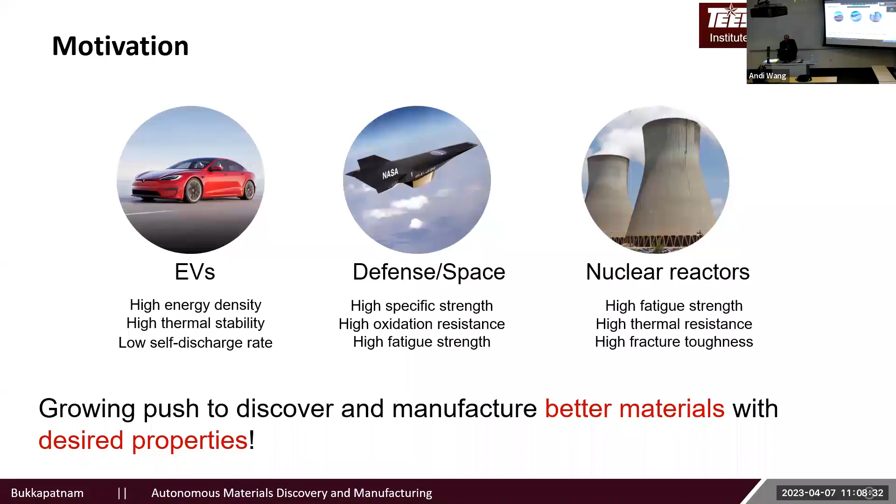But it's not so simple. It's not just about thinking up the materials, but you need to actually make them. The story I can bring is based on the case study of one of my colleagues, Ibrahim Karaman.

A few years ago, he was able to deploy the material he discovered into an aircraft system. It's a torque tube made out of shape memory alloy.

But if you think about what it actually takes to make those components, you have to come up with the right combination and make the material undergo an elaborate process chain of vacuum melting, forging, and then rolling, and then final heat treatment before you have a semblance of material that you could work with.

And each step of this process chain, you have to precisely control the composition, temperatures, as well as the processing trajectory. It's almost like making an elaborate and complicated recipe that you can eat.

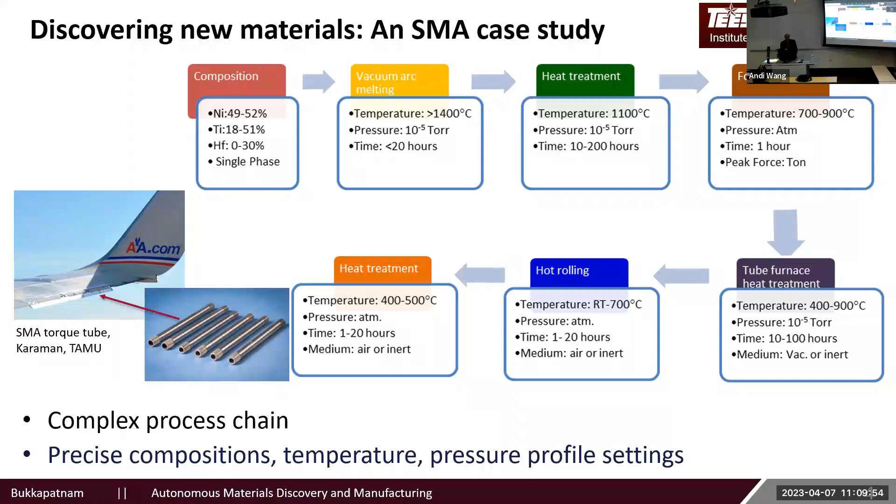And as a result, the whole thing took multiple years. It actually took 15 years from the point where Ibrahim thought about this material till he was able to actually see the material function the way it was intended to.

What was happening during this time? It's literally an Edisonian approach. That's what the material scientists do - trial and error. I'm sure those of you who are actually working in materials can quickly relate to that.

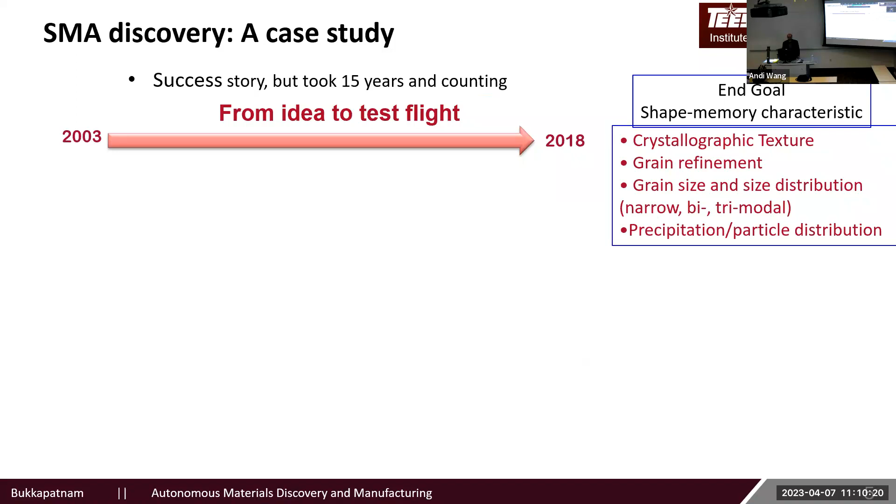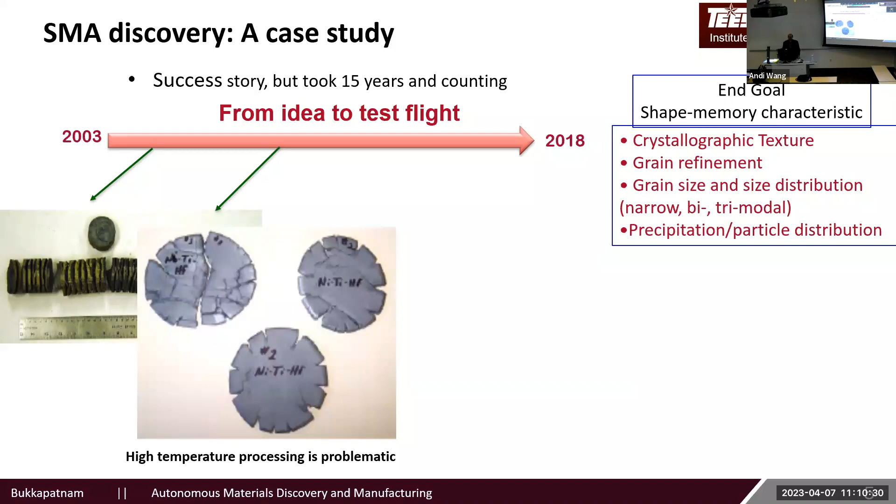You build a nice process to make this material. What comes out is literally junk. And then a couple of more iterations, you try to improve, and suddenly the eureka moment happens, and you get to what you're looking for.

This trial and error is extremely elaborate, time consuming, and extremely resource intensive, especially in the materials and manufacturing domain. The experiments that we really think about can run into a few thousand dollars for a single run.

You basically need to make sure not only you're making them, but you're studying what you have produced so that you can actually see if it meets what you're looking for or how well it does. That type of discovery process as it stands today is highly inefficient.

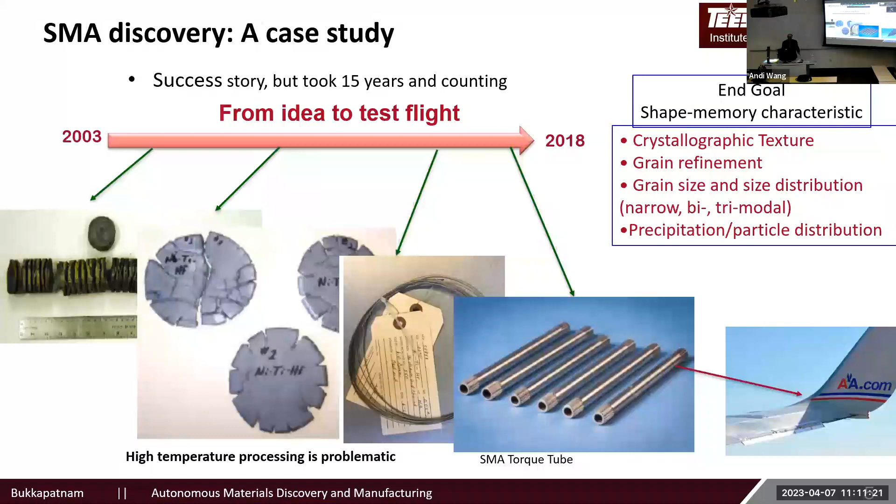This is pretty much a legacy from centuries of the discovery process. But now we have a newer challenge in hand. The idea is, can we think about this entire discovery process as some sort of an abstract frame and see if we can create our computers to do this discovery for us? And if so, to what extent can they do it? So just to abstract things up,

every experiment in effect is basically a point in this materials design space. You're trying to create a particular composition, what kind of elemental compositions you need for that particular alloy or type of material, what kind of recipe, what kind of process chain, and what kind of conditions you want so that you can get that particular material made.

That process is essentially one of traversing this highly high-dimensional and complex materials design space, where each point happens to be one experiment. Based on that experimental trial, you use your intuition to tell where your next trial has to be, and kind of traverse through this. And that's what took Ibrahim 15 years to come up with.

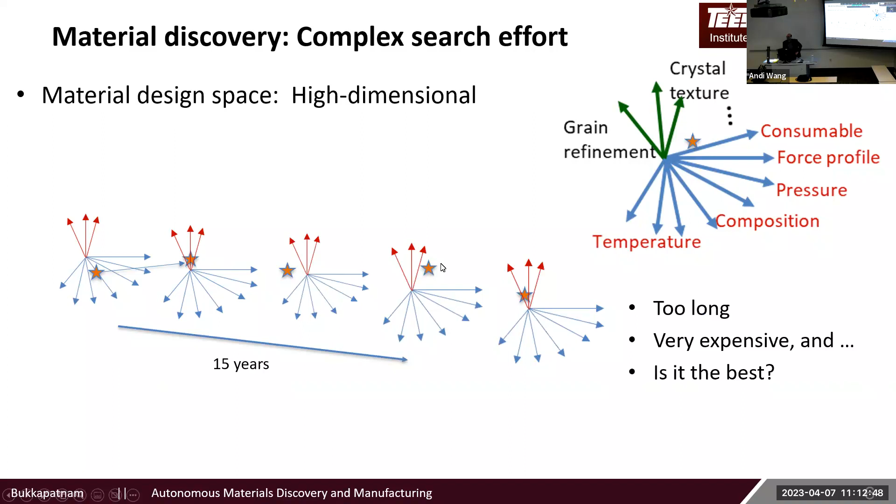Taking one experiment at a time, one combination of composition and one type of setting for all these different process parameters. Of course, it's too long, expensive, and needs to be improved.

Autonomous materials discovery and manufacturing focuses exactly on this challenge. And we are not the only group looking at autonomous materials discovery. In fact, the Department of Energy calls this a grand challenge of today, and uses that phrase on very few things—this happens to be one of those.

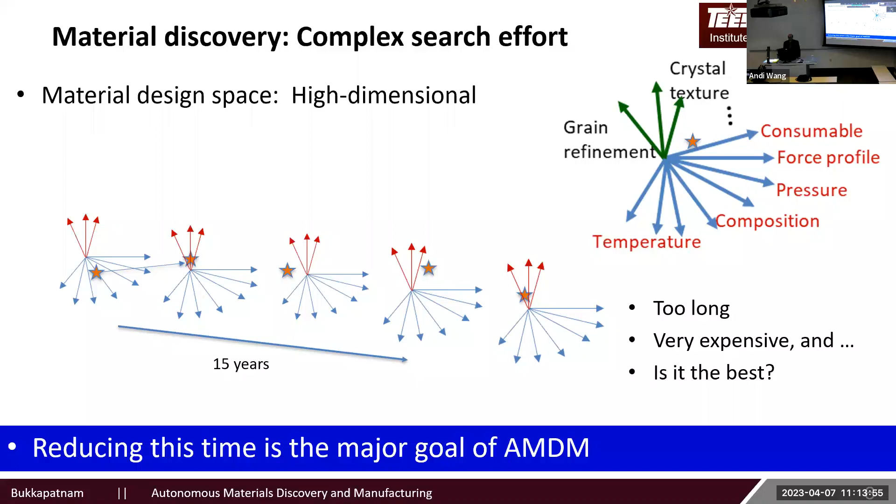But an even greater challenge we are trying to look at is the fact that you can think up and make a small piece of that material, especially in the polymeric space—you can create a good polymer with certain functionality at microscales. Can you actually manufacture these materials at bulk scales? And can you autonomously discover and make these materials for engineering applications in a single laboratory or shop floor platform? That remains the major challenge of autonomous materials discovery and manufacturing.

So to state it, the objective of this whole AMDM is to discover novel materials with specified, tailored properties, plus their manufacturing recipes or process plan, all done by computers using AI and data science. That is basically the major objective of this work.

And when we think about autonomy, that is another one of those abused words that you get to see, right? So I can put 'autonomy' so that I can get funded, I guess. But autonomy, essentially, if you go into the roots of it, has to have two components.

An autonomous system has to have the ability to learn. In the case of AMDM, it needs to have the ability to learn the underlying relationship that connects the process with the material that you made and the property you endow in it—PSP.

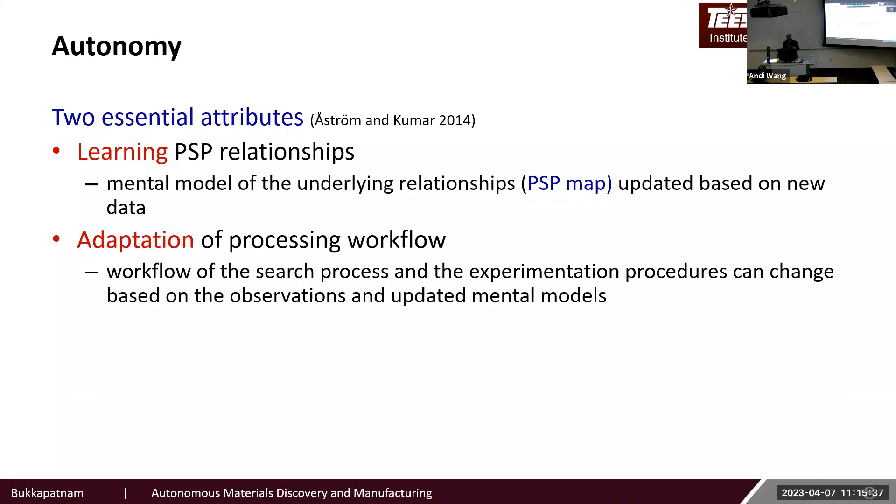And second is adaptation. You are not only learning about this relationship, but you are trying to sense the current state of yourself and the environment. Based on that, you tune your next step of how you traverse the discovery process, be it changing settings for the next iteration of your experiment, or changing process settings on the go based on the parameters you're able to glean. That type of learning and adaptation are essential components for any kind of autonomous system.

And of course, you can go to the next higher levels of autonomy. The system can have the ability to have cognition, have empathy, and the ability to be surprised and react to surprises, and have higher-order reasoning just beyond what it's able to learn. An autonomous system in this context has to be thought of and framed in terms of these properties that we want to enter.

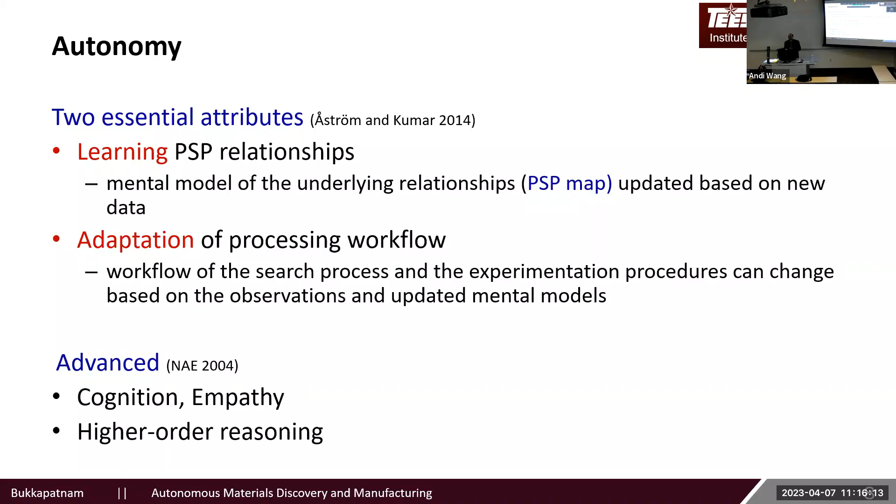And how can we build an autonomous system for materials discovery and manufacturing? We can think in terms of an autonomous cyber-physical system that we can construct for AMDM. In effect, such a system will have two components. The first one, which you see on top, is a brain, and it basically uses some kind of AI built into it.

And second is basically the brawn or the body of that system, which is essentially the manufacturing shop floor. So essentially, in some ways, an AI-driven manufacturing floor is what you can think about.

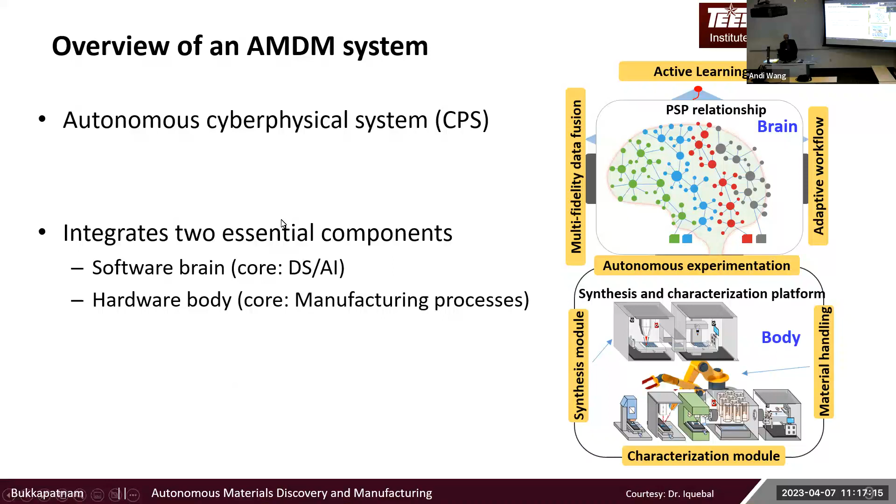There is always a debate, which is not well settled, as to whether an autonomous system has to be automated, essentially, or can an autonomous system be without full automation. Are they complementary, or basically subsets of each other? That's debatable, but in essence, an autonomous system has to have the properties that I mentioned. And also, it needs to address some interesting challenges.

The first one is it has to be able to learn the process structure property map that I had alluded to earlier. And it needs to be able to learn from the data that emerges in the process of discovery and adapt itself. What kind of timescales over which this data appears, and over what type of spatial distribution this data emerges, those need to be considered too. And also same thing with the adaptation in terms of how it adapts and how it reacts to those.

In this context, it's important to discern the difference between process to structure relationship and structure to property relationship. If you look at the overall material science work in this autonomous materials discovery, or materials design in general, the focus remains almost exclusively on capturing this structure to property relationship -- given my structure, what kind of properties would I have? Very little, relatively, has focused on connecting the process to the structure.

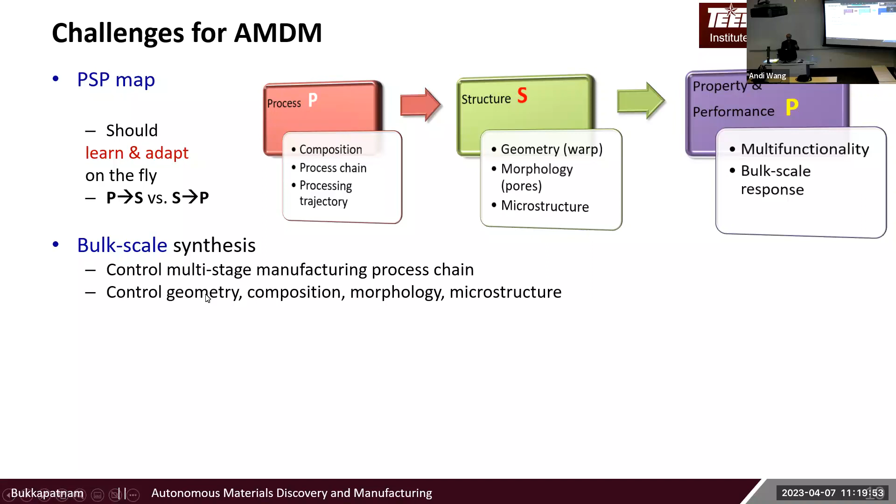Because you need to control not just the microstructure, as the material scientists would like to focus on, but go beyond that. You need to control the morphology, composition, and the geometry of the material. How can you endow those?

Third important challenge emerges from our ability to react to what you perceive. These control loops can happen at three different scales of resolution. You can control the process chain in the sense that go from one machine to the other. I can skip one machine and so on, just change the process flow. Sometimes you might need some extra rework. You can build that -- essentially creating that process chain sequence control.

Second aspect is looking at an equipment, trying to change the settings of the equipment. And third, which is probably more important for materials discovery, is the process state control -- how can you control the state of the process or the state of the materials that are being made as they are being made?

And also, while you do that, you need to think about a way in which you iterate across the experiments, from what you learn and how you react, by intelligently traversing the high dimensional space of materials that I spoke about. Whether you see some good opportunity and then search around that point to get the best result, or look at a point that is far away opportunistically, looking for something like fool's gold -- there may be something out there. So how do you go search for this gold mine of the new material you want to discover? These remain the essential challenges.

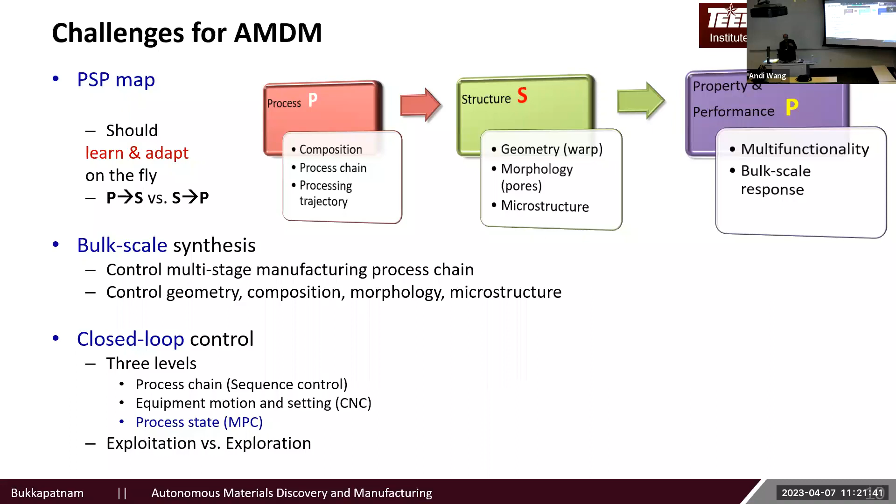So if you want to actually develop a system that achieves this autonomous materials discovery and manufacturing, you need to have a way to address these challenges at the very minimum. One implementation that we have got going at Texas A&M, we call the Smart Hybrid Machine Tool Platform. The remainder of the talk, I'll just basically share with you what this platform looks like and what we are using this platform for.

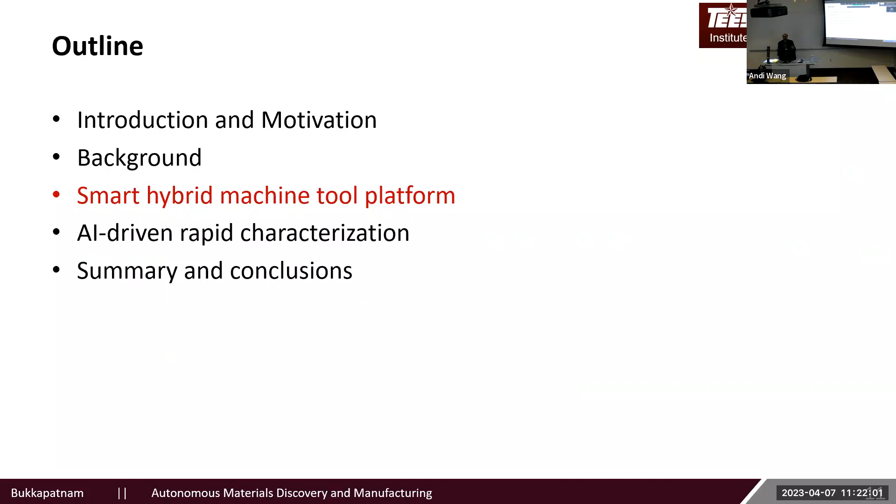This, if you can think about a hybrid platform as something that puts together multiple manufacturing processes into a single machine tool -- I like to call this a Swiss knife for manufacturing. So you can think about this machine: you can 3D print using a particular type of 3D printing process, it's a laser directed energy deposition.

And you can actually have a CNC head just next to it. There are two things: on the left, you see a laser head, and on the right, you see a CNC head. So you can actually use different kinds of machining.

End milling works really well. In addition, you can use the same laser head to kind of ablate the surface and beyond. And also, this machine has a turret. Basically, you can have 8 to 16 different tools with which you can work on the surface. You can grind it, form it, polish it, and so on.

So the advantage of putting all of them into a single machine is datum. Whenever you want to achieve precision, datum is important. You can actually tee off of what you printed to ensure what you subsequently machine meets what you want.

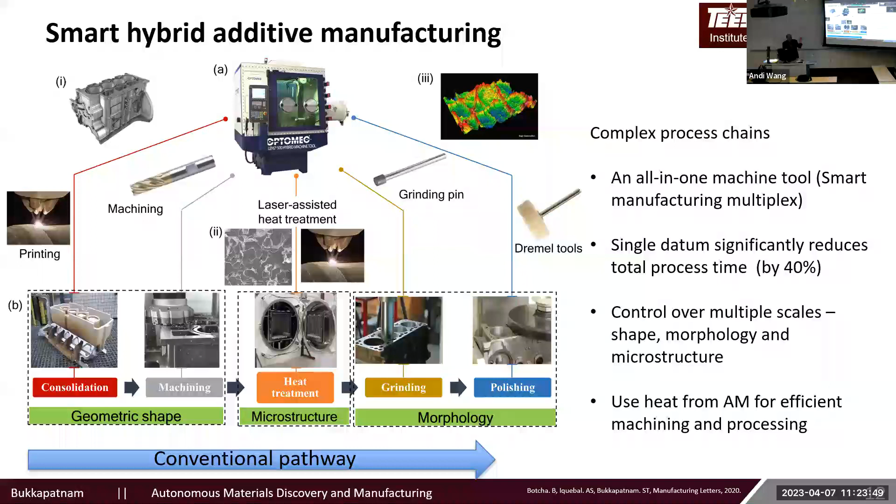It reduces the processing time. And also, since you're actually looking at multiple processes in a single location, you can possibly achieve better control, not just over the geometry, but also morphology and possibly microstructure. And you can get some energy efficient process chains, because the material gets a lot of energy into it during the printing process. How can we really harness that energy so that you can probably process that material using a much more favorable regime during machining and so on?

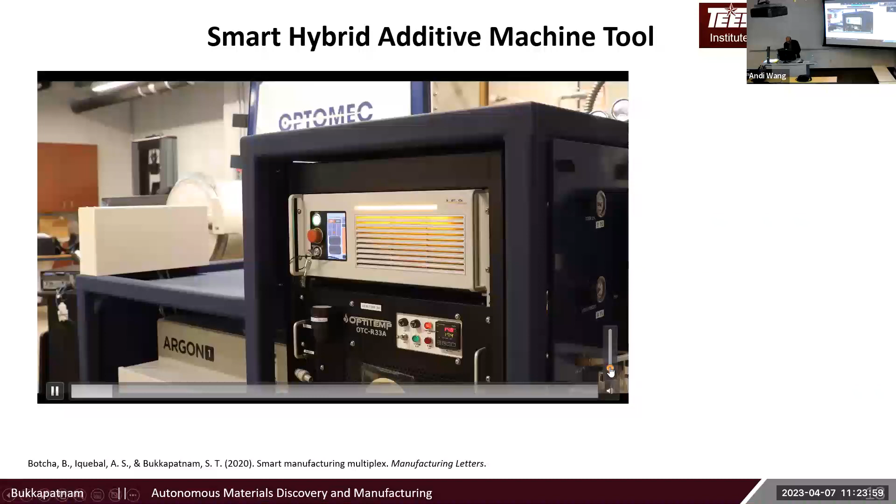So these are all some kind of possibilities. I'm going to see if I can play the small video here that shows that machine and how it actually works. So essentially you have a laser head.

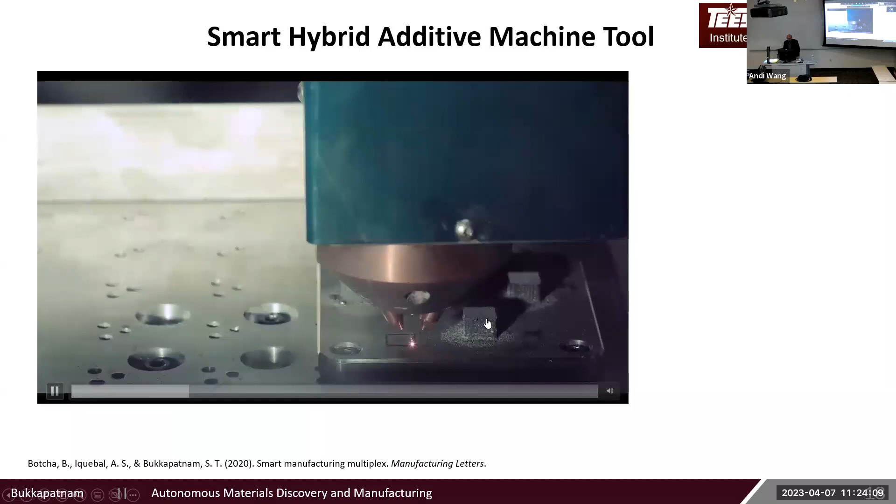The Smart Hybrid Machine combines additive manufacturing and machining. It uses lasers, metal powders, and heat treatment to modify the structure and properties of the created materials while collecting data about the material.

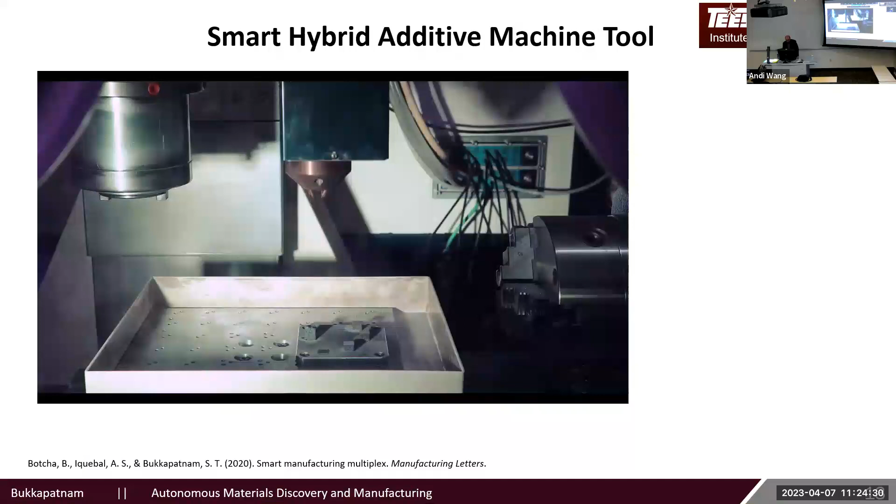This process can be automatically controlled using a computer. The computer uses code to create parts that can be simulated and verified by the machine before printing begins.

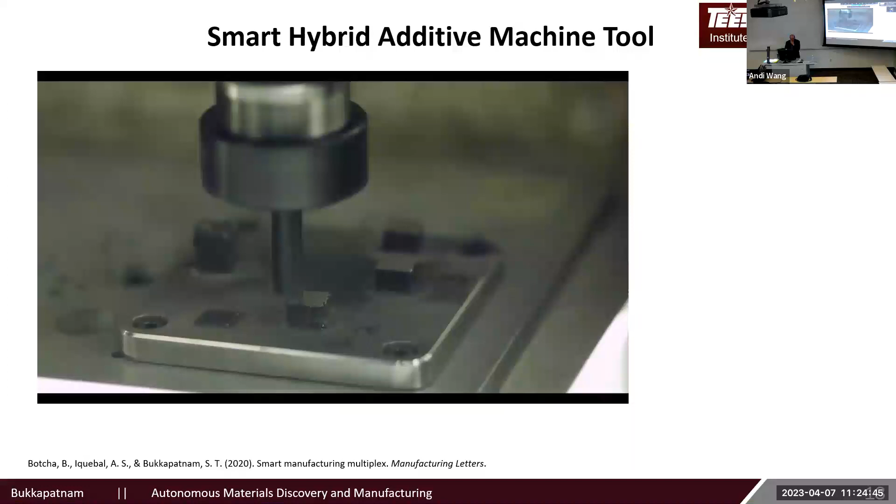The synchronous use of a high-speed camera and other instruments allows for faster data collection, which will speed up the discoveries of material properties. Around 1 gigabyte of data is generated every minute by the machine. This data, along with the discoveries from the machine, are speeding up materials discovery for the future.

Yeah, let me break this down a little bit. This machine can produce multiple batches. Within each batch, you can possibly create, I would say, like a centimeter by centimeter footprint, a dozen such materials. Each material can be made of totally different materials.

Each structure can be made out of different materials because you have a combination to do in situ alloying. In fact, each layer of this structure can be made out of different materials. Here you can see that the bottom has slightly different materials on top. So one was 316L, the other one is cobalt chrome.

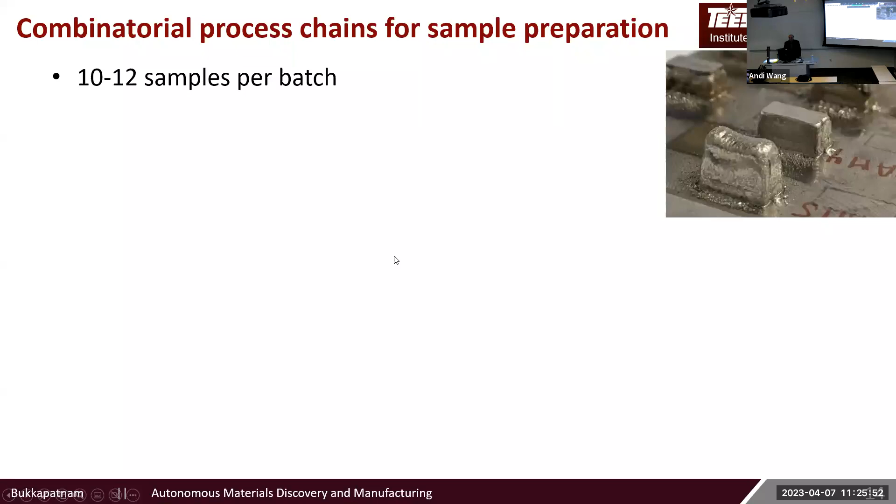You can just put one on top of each other. And in fact, each layer can be a different alloy in itself. And each track can be different ones too.

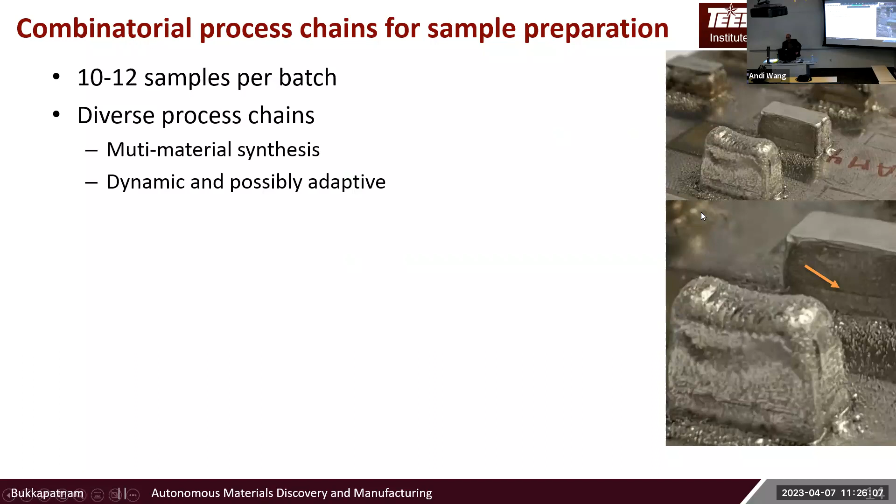So you can actually enhance the process chains. You can have multiple materials. You can synthesize in a single build. You can have thousands of different materials, and you can basically adapt it based on what you see of one material to build the next material and so on.

And we have been building some kind of external control loops to enable the use of information that we glean from various sensors to be able to adjust these so-called G codes on the fly.

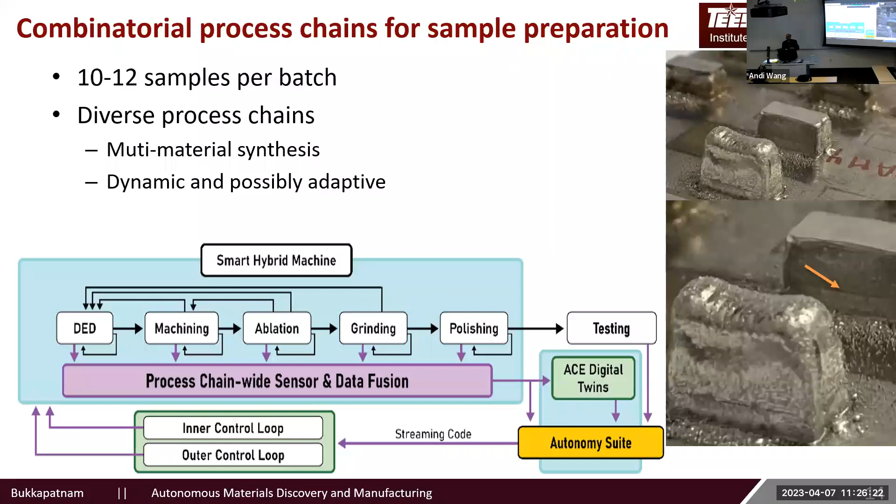And you can have these process chains not just limited to 3D printing alone and machining alone, but combinations actually create some very interesting synergies.

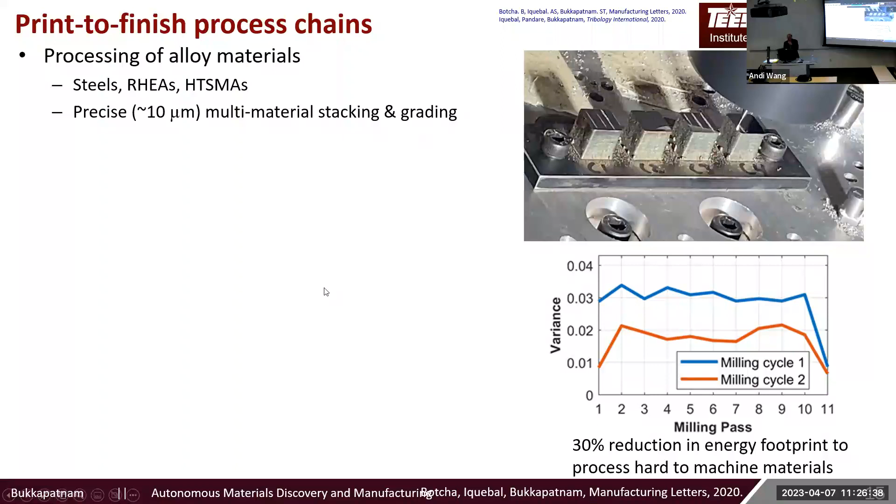And we have dabbled with different kinds of metallic materials. But most importantly, we can actually create characterization-ready samples while you're building it. So in other words, we pretty much literally start with a clean slate, or basically clean plate. And we can 3D print and then use this process chain to create surfaces that are almost like metallic mirrors.

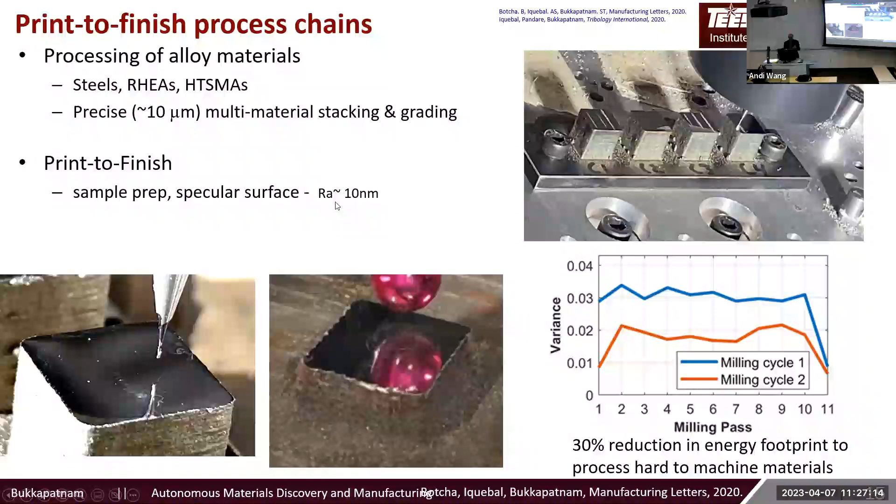You can actually etch it, or you can image it. You can do lots of interesting things, the same thing. Of course, it's all students who did all the hard work. They can demonstrate that they can get Ra as low as 10 nanometers, and possibly over time, they can do even better. And more importantly, this machine has been endowed with 14 different channels of sensors.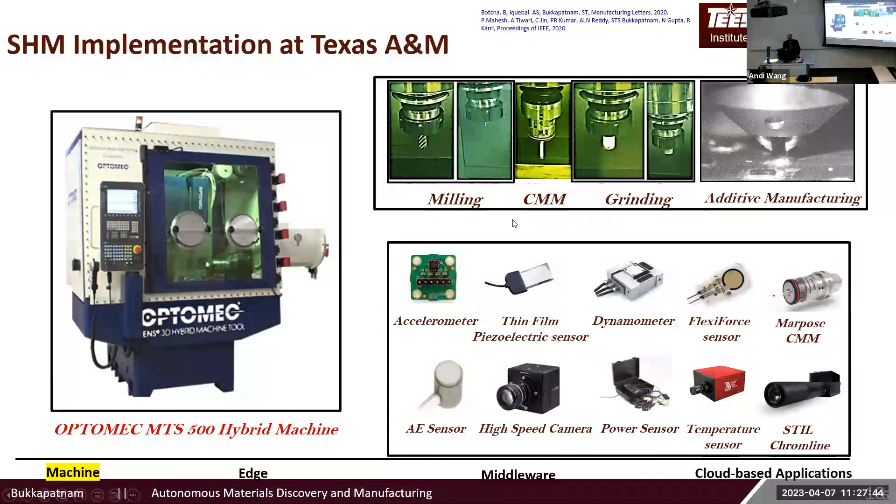We call this magic plate. Under the substrate on which you build the thing, we basically built a lot of MEMS sensors, thin film sensors to measure forces, acoustic emission, vibrations, and so on, in addition to having images to capture what's going on. We've been able to use process knowledge itself to align them to a few millisecond precision and a hundred micrometer precision in space.

On the left-hand side, you see multiple data streams synced up: acoustic emission, accelerometer, forces, thermal images, and data from the controller itself, OPC data. All of them could be captured, not only for printing, but also for machining.

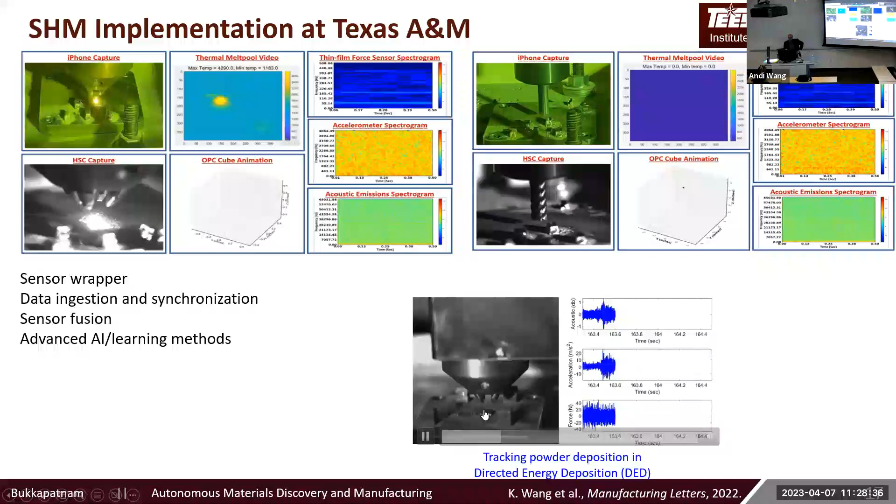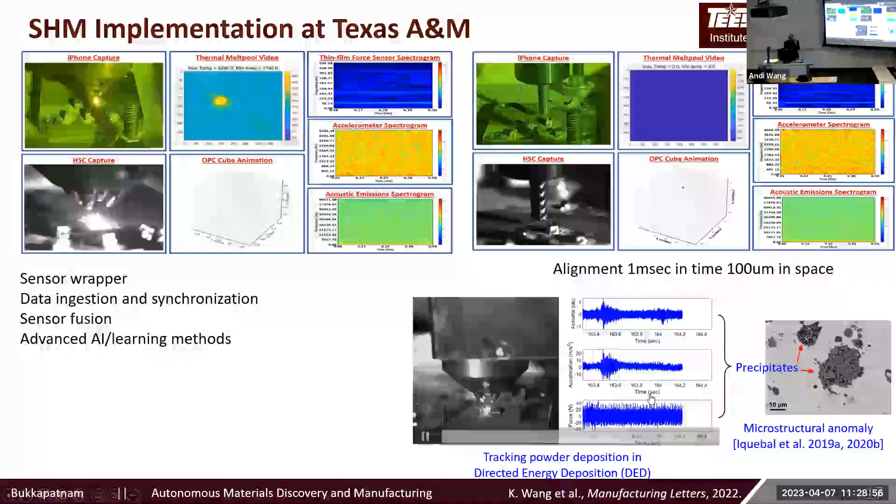From a research standpoint, what's exciting here is our ability to monitor the process in unique ways. While building a part, you can observe a small voxel, a fraction of a millimeter, on anything printed, and go back and ask what signals were generated while that voxel was being printed and subsequently machined at a different time. Or look at the surface and see what was happening during the process.

So essentially, you can do what is called multimodal data analysis and interesting interrogations that are going to be very important for autonomous materials discovery, because that's the data you need to enhance the perception to be able to adapt effectively.

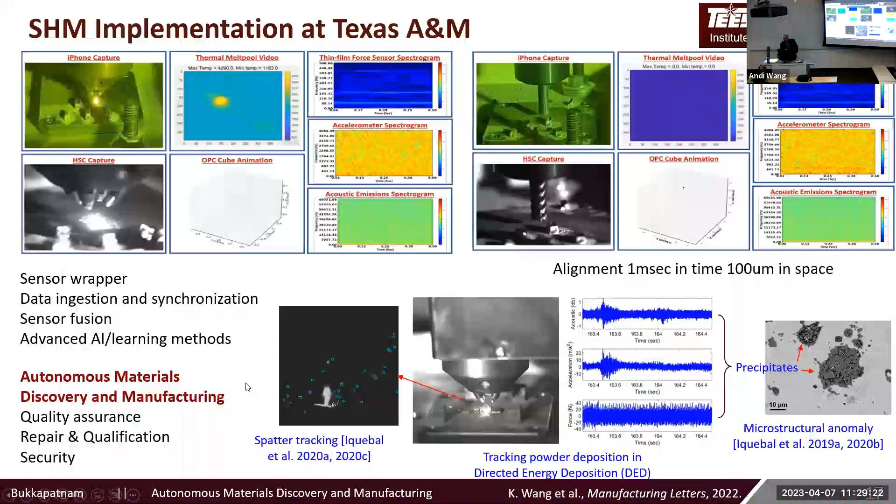This type of alignment builds some very interesting possibilities. So that's where I'll spend the remainder of this time on some interesting AI/ML methods we were able to develop. Specifically, we're not looking at improving how we make the part, but how we actually measure what comes out of the process.

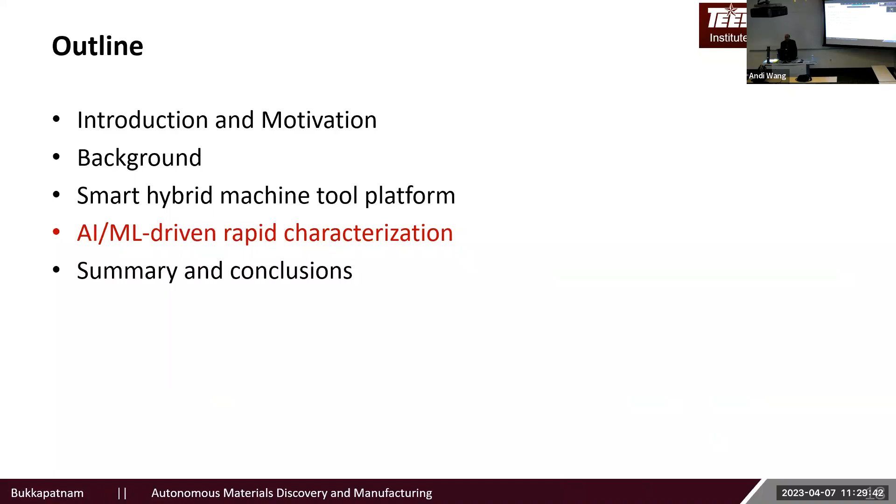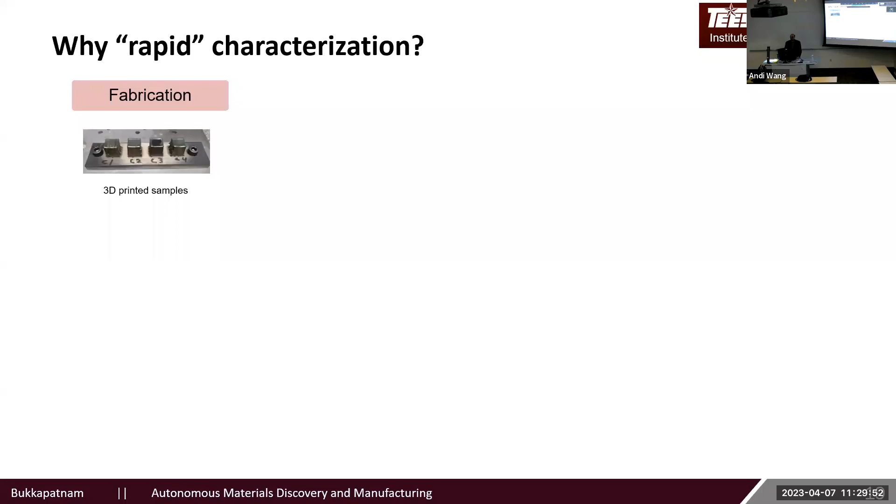We call this rapid characterization. Why do we need this? Because when you look at the materials we use for materials discovery, we fabricate them, and once fabricated, you actually remove the samples many times.

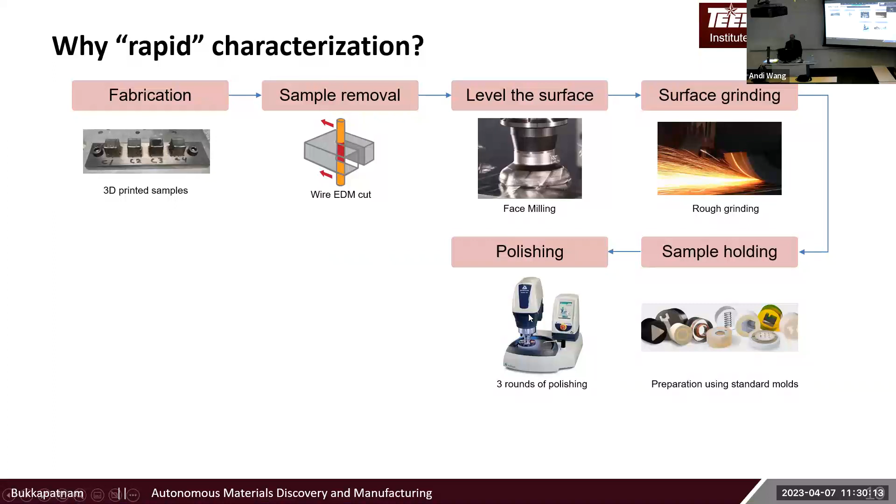For each one, before you finish it, you level machine, rough grind, then hold the sample in some kind of polymer, polish, and then do microscopy and other kinds of analysis. That's the usual process chain for studying and assessing properties, and typically it takes many machines, many steps, is extremely time consuming, and needs multiple experts.

Quickly, you can see why this hybrid machine can solve some of these problems—you can do all of these things in a single setting.

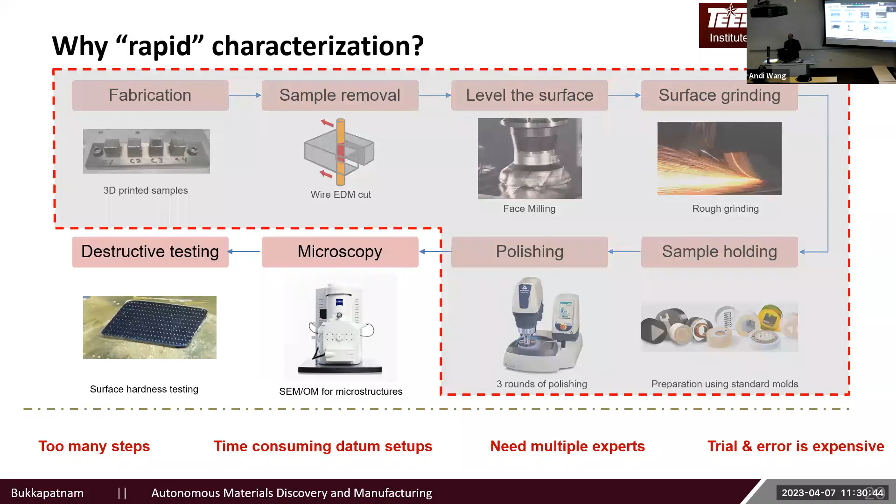As mentioned, we can go through these steps and improve the surface as we are actually making it, within a matter of a few minutes. Print and all the way to polishing can be done very rapidly, and more importantly, the signals we get can be used for interesting characterization applications.

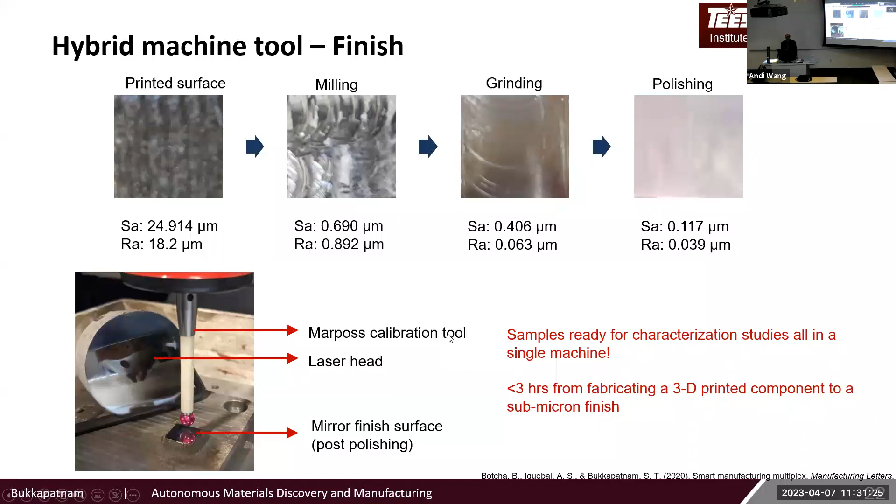I'll accelerate a little bit so we can go through this in less than 3 hours, from the moment you decide to print a particular material till you have all the property information, or at least the important property information on hand. How do we do that?

The idea is to look at how the process informs the microstructure or complete structure, and how that in turn informs the property. When we look at the whole cycle, the last AM-DM conference—called the DMDI conference, done by the National Academy in November of 2022—honed in on this issue of structure.

You can make the parts, you can measure the property, but getting the structure measured, characterizing the structure, remains the important bottleneck. And when you talk about structure, you shouldn't be myopic and just look at the microstructure or composition—a structure is essentially a multi-scale entity. You need to look at geometry, morphology, microstructure, and composition.

In the remainder of this talk, I'll just talk about one example of how we study one aspect of morphology and one aspect of microstructure and properties.

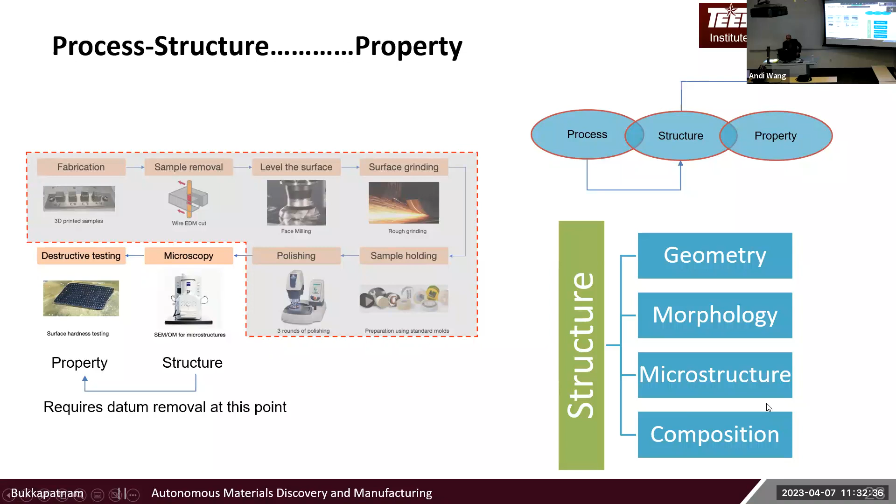When we talk about morphology, in addition to surface roughness, you have to worry about some interesting traces a process leaves behind. For example, in the 3D printing process, ripple structure is an important determinant. Once you effectively capture the ripple structure, you can pretty much tell what kind of microstructure and grain structure you get to see.

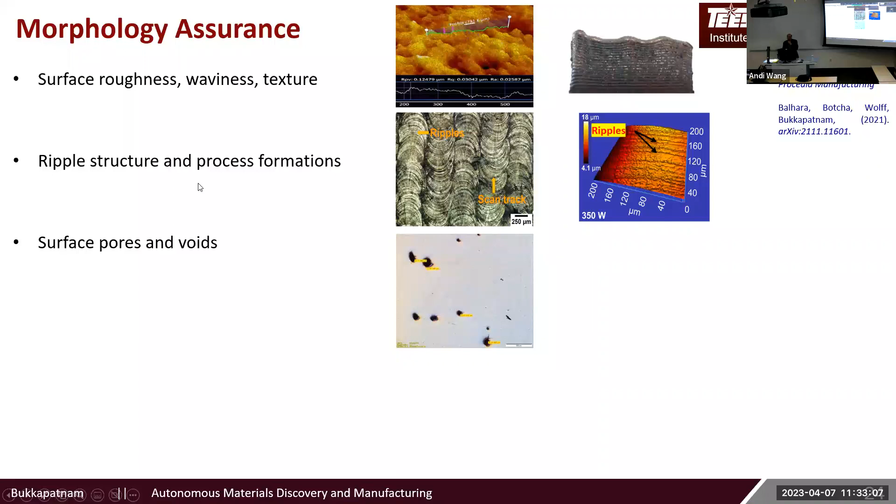You also need to worry about interesting features, sometimes called defects, like surface pores and voids, internal inclusions, scratches, and other external features. These tend to seriously undermine, oftentimes, the properties you're looking for. It's not the microstructure, but actually the issues with morphology that you need to really account for.

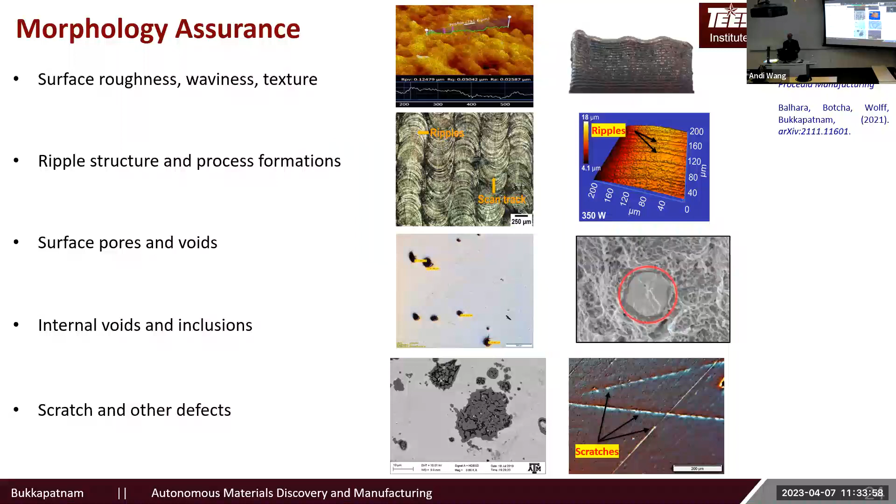The research has effectively focused on many of these, but most importantly, it studied the surface pores and prediction of these pores in the 3D printing process, because pores tend to be extremely deleterious. People have also talked about effectively controlling the pores to get the right effective density for some applications. But nonetheless, pores can be a major issue, and you need to be able to effectively monitor and track these pores as the process goes.

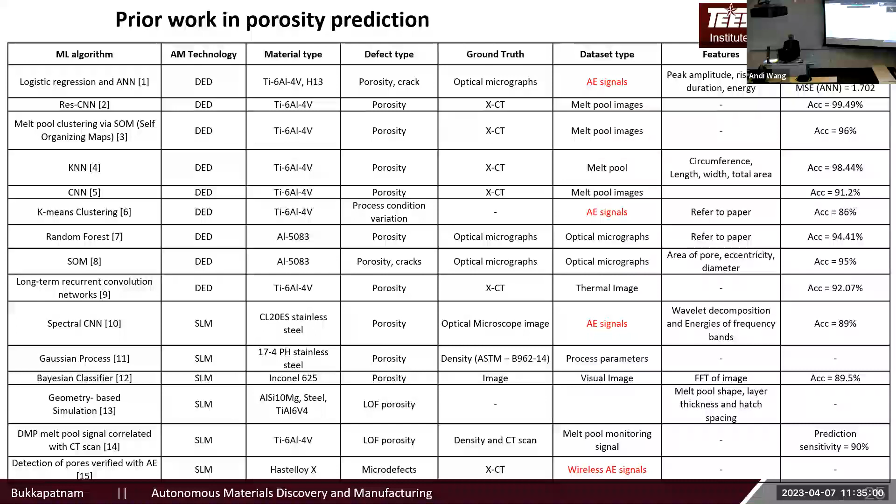Second, some people have tried to use acoustic emission signals to predict—essentially looking at the acoustic emission energy to predict whether that particular part will have or will not have a pore. But they were not able to localize whether a particular region or voxel within a part will have pores, or if so, how much, and so on. So there is no specificity.

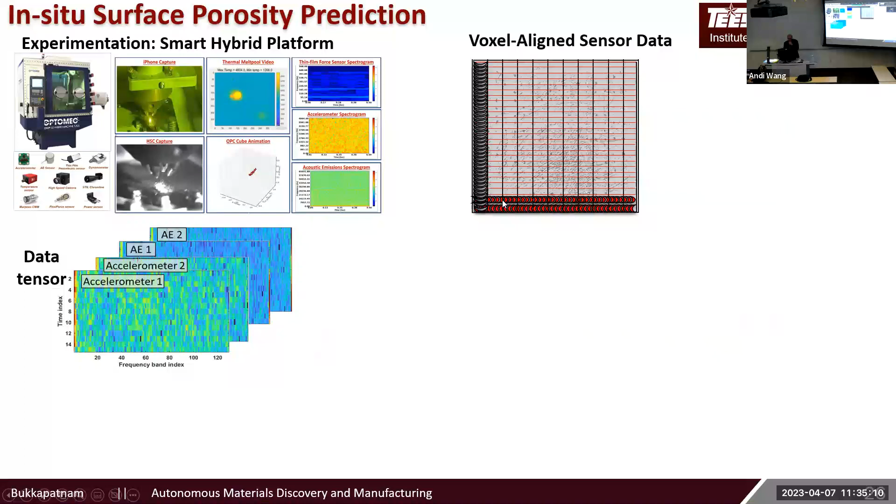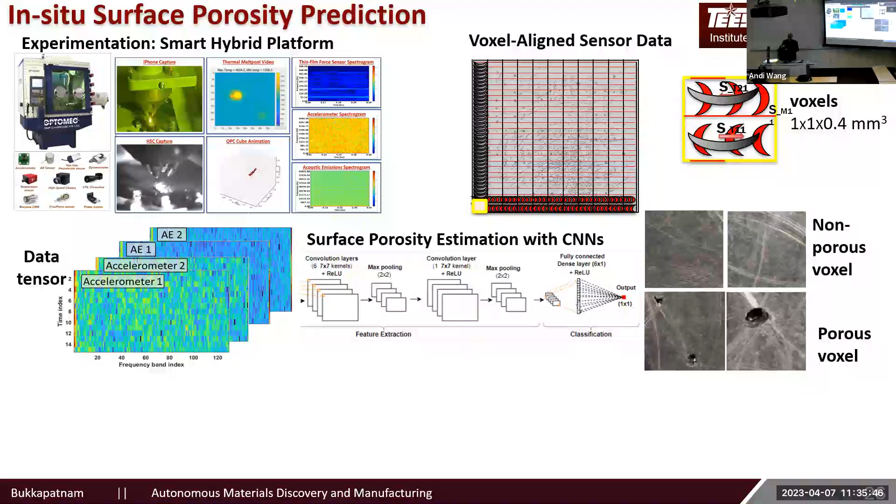So what we try to do is ask: can we predict whether a particular voxel that you have printed will have or not have pores, based on the various stacks of data we collect during the process? We are collecting acoustic emission data, and thinking of it as a data stream—can we use that to predict whether that voxel has pores or not? We can think of each voxel as being on the order of 1 millimeter or less. So, essentially scanning every 1 millimeter area based on the signal, how well can we predict?

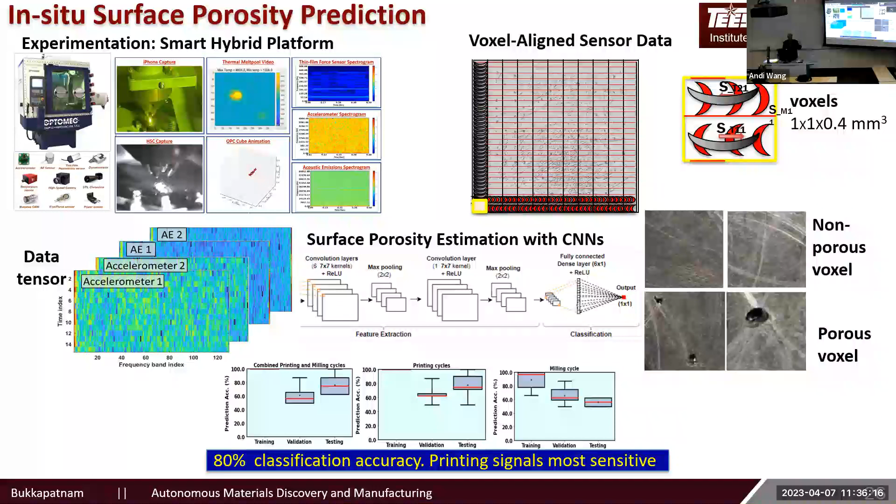It turns out, using just the printing data alone, you can get fairly good prediction accuracies. For training you can get quite high accuracy, but even for testing you can get at least 70%. So there's a high correlation with this data. You don't need high-cost images—simple, cheap data from simple MEMS sensors, literally less than $10 each, can be used for these applications.

Of course, deep learning can relate anything you want. But is there any physics underlying it? Is there something we can learn about the process? That's where we use methods called explainable AI, or XAI, to look deeper into why this happens.

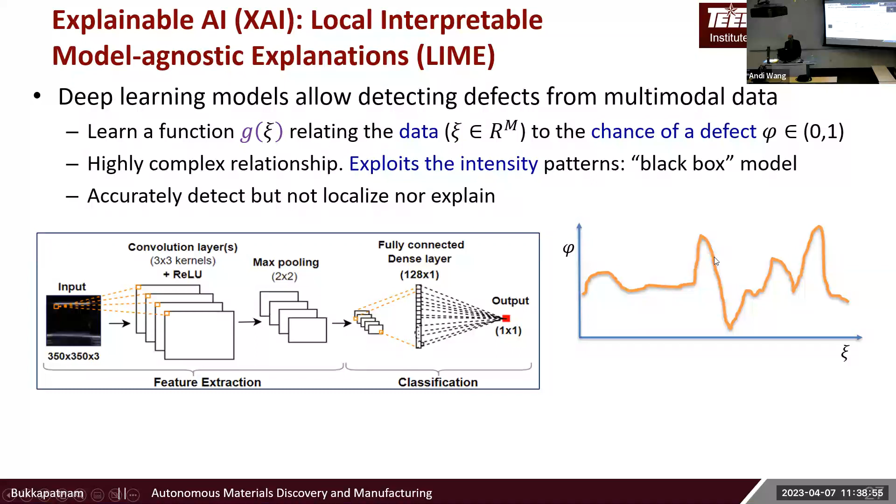A simple line graph illustrates this. Suppose I'm looking at a particular pixel, or a particular acoustic emission data point. As my acoustic emission increases in intensity, the probability of presence or absence of a pore doesn't increase linearly—it increases and decreases in a very nonlinear way. Around this value of intensity, as intensity increases, the probability drops, whereas around this other point, if intensity increases, the probability increases.

If I take a global picture and look at a particular component and how it influences the output, it's almost like putting one foot in cold water and one foot in hot water and saying that nothing influences. So you get highly misleading results.

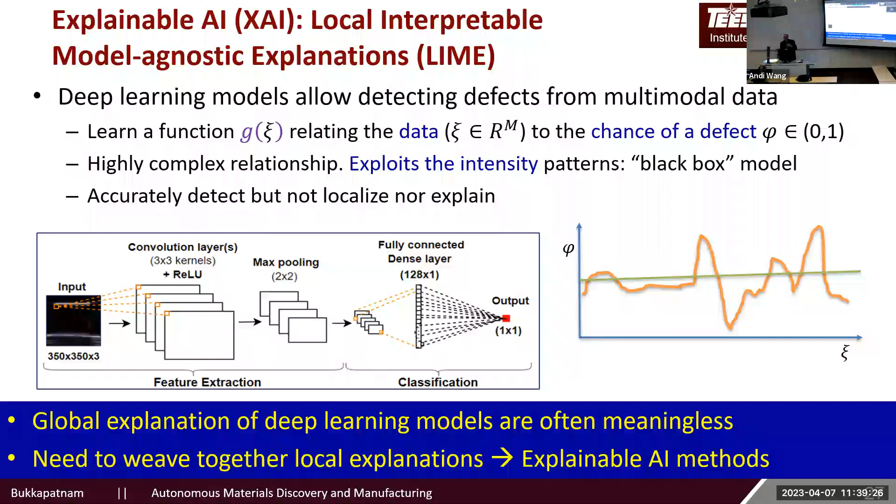So what these XAI methods do is come up with simpler explanations for every region and stitch them together to derive some global explanation. They use simple linear models around each input to come up with a beta, which tells you the influence of each input component on your output at a particular location. It generates multiple betas, one at each location, and based on the collection of beta values, it provides an idea of how individual components of data inform your output.

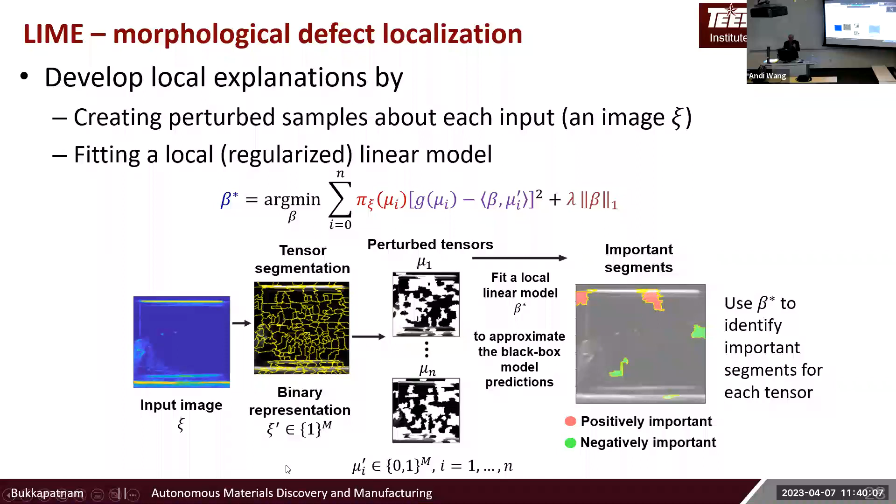You can actually learn something very useful from there. It uses some kind of perturbations of your input image to create samples to build these types of models, and here you need to be extremely careful about how you choose these perturbations. Otherwise, you might get some kind of absurd results.

There are some very nice works happening in terms of building the right kind of models to generate these local explanations. Once you build those local explanations, how do you bring them together to create global understanding, stitching them together? That also remains a major problem. There are different kinds of ranking criteria that people have developed to consolidate these local inputs to create a more stitched up response.

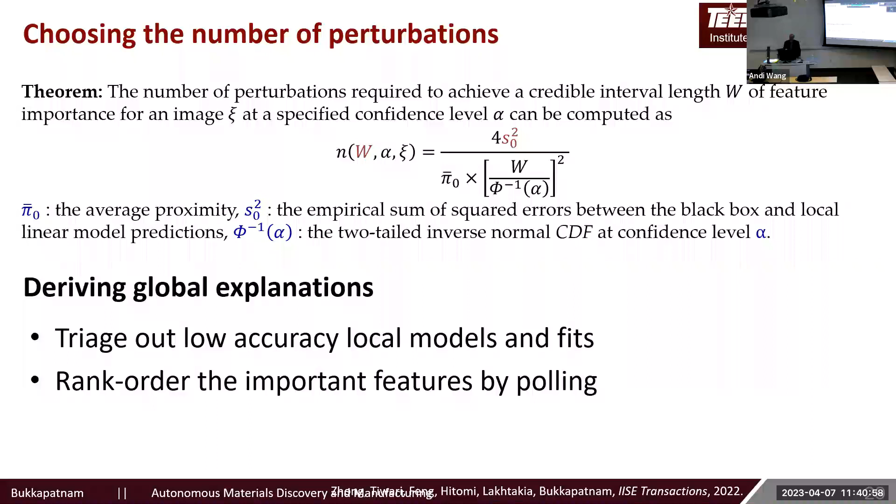An even more important challenge is, based on these outputs, how can you generate physically meaningful information about what relationship you're trying to track? How do you come up with a physical explanation from purely the mathematical outputs of these linear models?

To illustrate that, let me show a simple result we got. For this particular model, we found that the LIME importance, the beta values, were very high for the high frequency components of the acoustic emission. In other words, nothing else mattered except for these high frequency components.

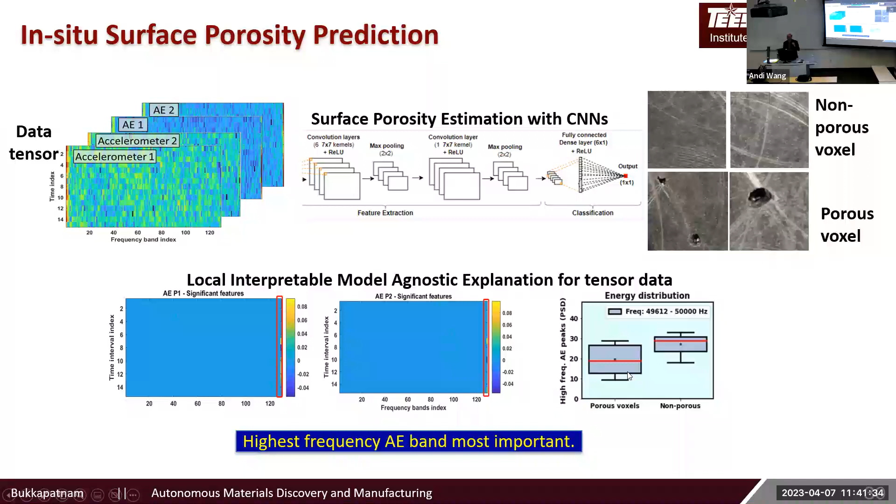And it somehow shows that for non-porous voxels, you have slightly higher energy compared to the porous voxels, for these higher frequency components. That's great, right? Why does that happen?

It turns out that if you look at these higher frequency components of acoustic emission at different points in time, they have different levels of energy. It's almost like some kind of waveform was taking place. And the variations for the non-porous were much less compared to the porous voxels. As a result, for porous voxels you have kind of an on-off behavior, and as a result the energy was a little bit low.

Second thing that really stood out was that even among the porous voxels, this whole region is split into two. When you go back and observe the images, you basically have higher energy among the porous voxels when you have spatter, versus when you don't have spatter.

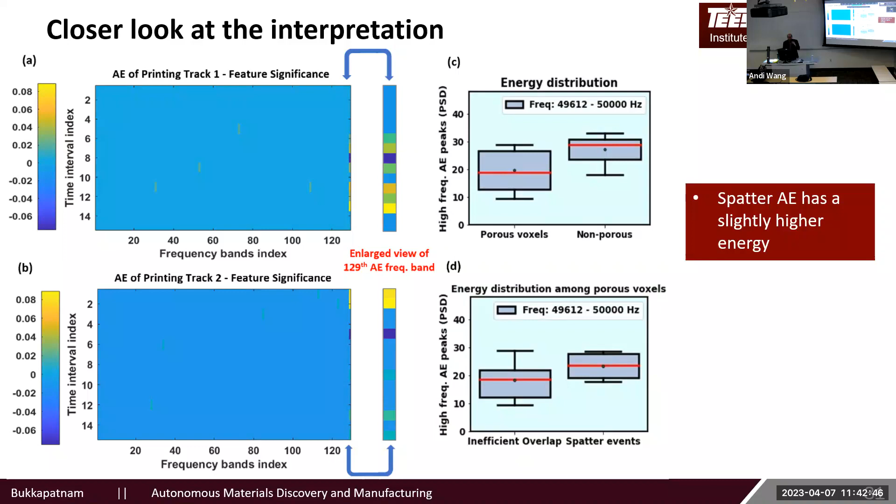Whenever you have slightly higher energy among the porous voxels, you tend to have highly spattery patterns in your thermal images, like sparklers flying on the Fourth of July. And when you have that low energy in the porous voxels, you basically have a very benign type of approach. So you have this huge energy variation.

If you look at the overall results once again, the higher frequency band of acoustic emission pretty much carries the information needed for detecting pores within a particular voxel region, and these high frequency bands are somehow capturing the information related to the spatters that are taking place.

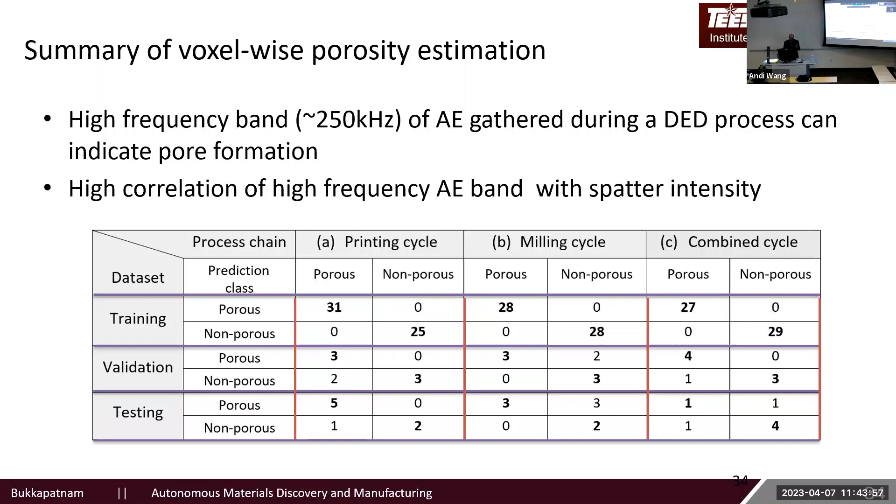We are still working a little bit on how we can clearly characterize the time frequency characteristics of the acoustic emission related to the generation of spatter. There may be some very interesting outcomes we are looking for, where we can actually use it to effectively control some of these pore formation mechanisms.

I'm going to shift gears a little bit and run through an interesting facet of what we have been doing. We can also use not just the acoustic emission, but simple images taken online or offline to determine some of the properties.

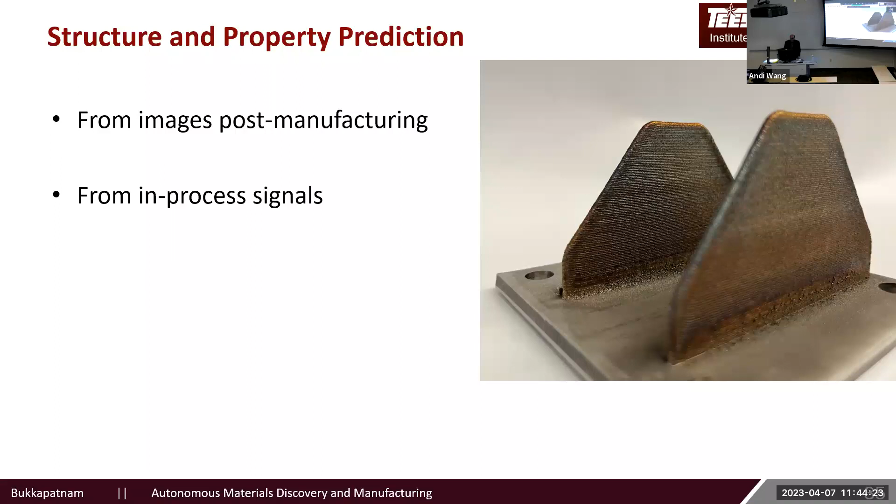Why is this important? Because to go and get that measurement offline will take an hour. Can we have the surface, and use those images which are abundant, to predict what kind of hardness it has?

But you need to, if you look at the surface, it's basically highly heterogeneous. It has different kinds of grains, and different grain boundaries separating them. So what you measure as hardness is basically a result of the composition of different kinds of grains put together.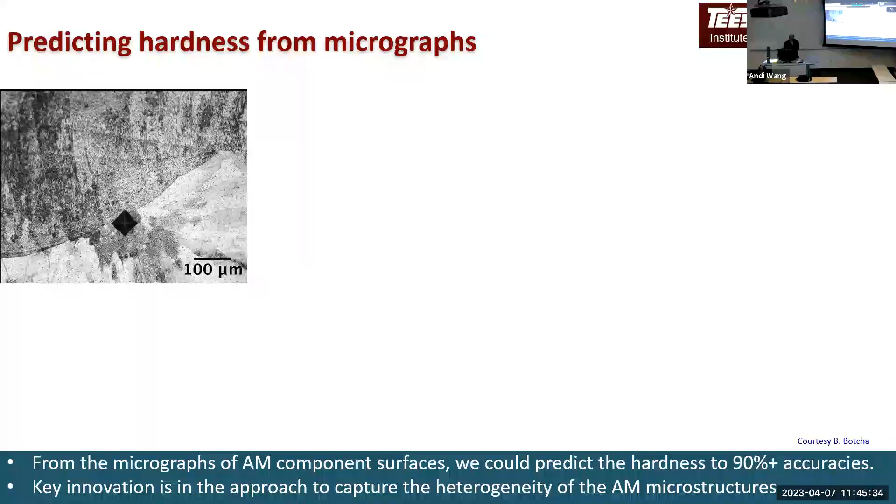In some ways, predicting this hardness is very similar to predicting how the face of my child will look by taking a photograph of me. But you can do a little bit better if you take not only my photograph, but my wife's photograph, and maybe the photographs of all my relatives. And if you put that into a machine learning method, you may have a better chance of predicting the photograph of my son.

Something like that. So that's exactly what we did. Instead of trying to take the photograph exactly here and use that image to predict, we took the nearby surrounding images, and we built a foundation AI-based method. Essentially, we trained a VGG16 for feature extraction.

Basically, it compresses this tensor into some kind of a flattened, low-dimensional representation, and uses this low-dimensional representation to predict the hardness. In our case, we were able to predict it.

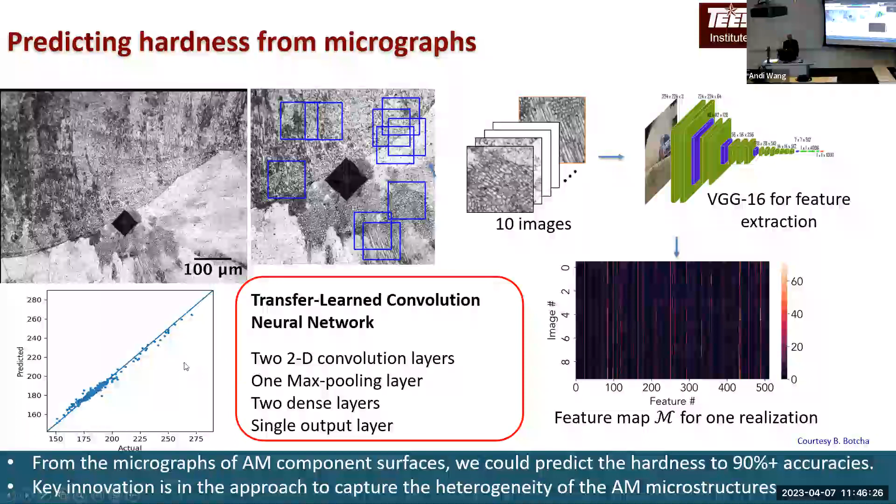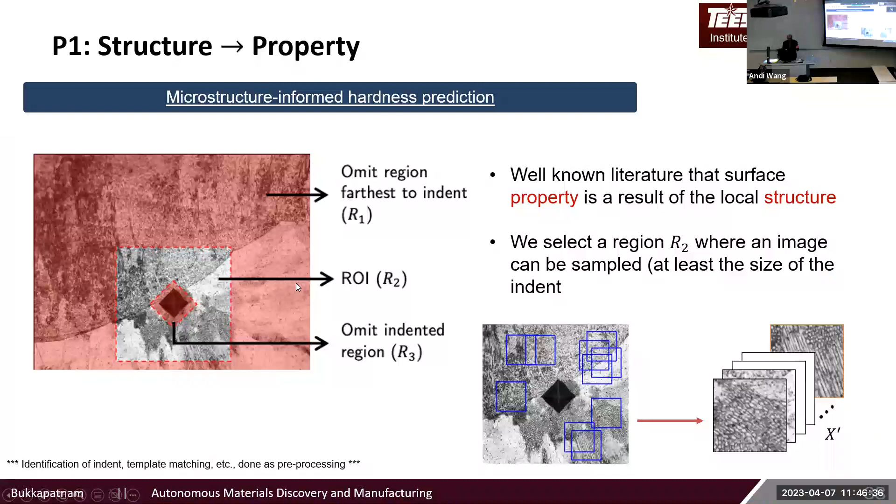I'm going to run through this quickly in the interest of time. That's exactly what we've done. We looked at the region of interest—how do you determine this—and within the region of interest, we select multiple inputs. From multiple inputs, you need to recognize the diversity of pattern you're getting.

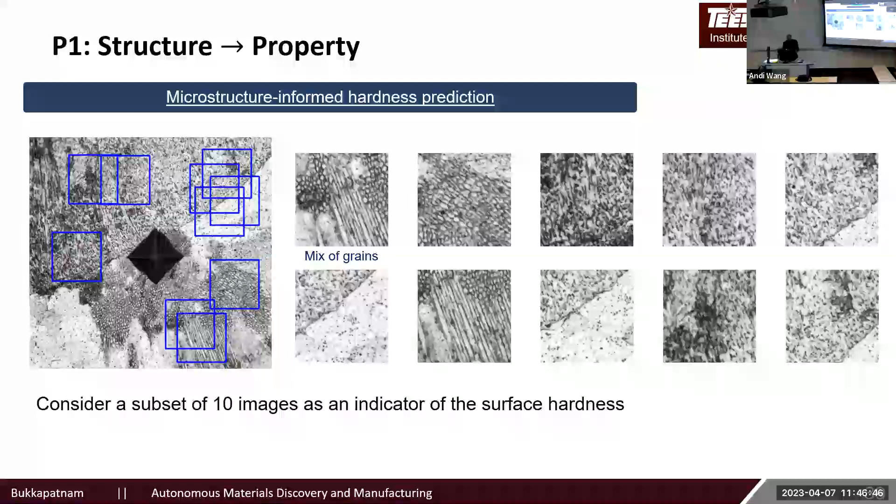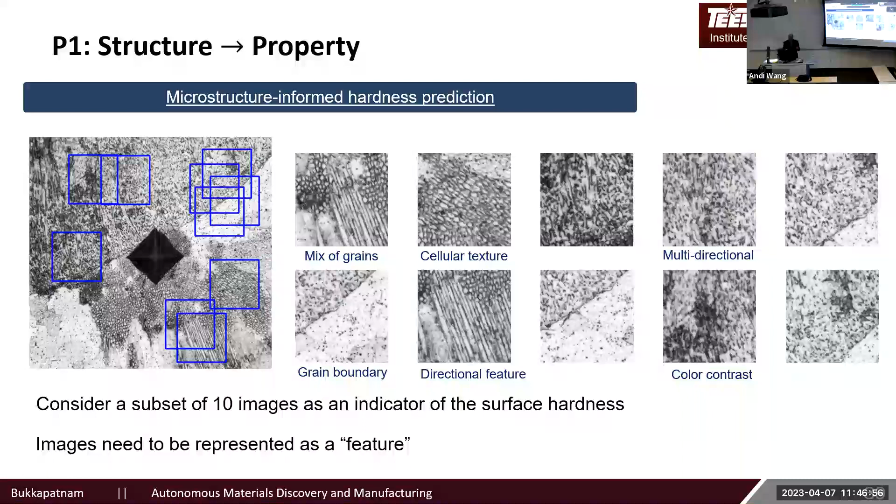You get different mixtures of grains, different kinds of textures, directionality, grain boundaries, all kinds of different features. These images somehow capture a combination of all those, and then we send it through a kind of foundational AI model.

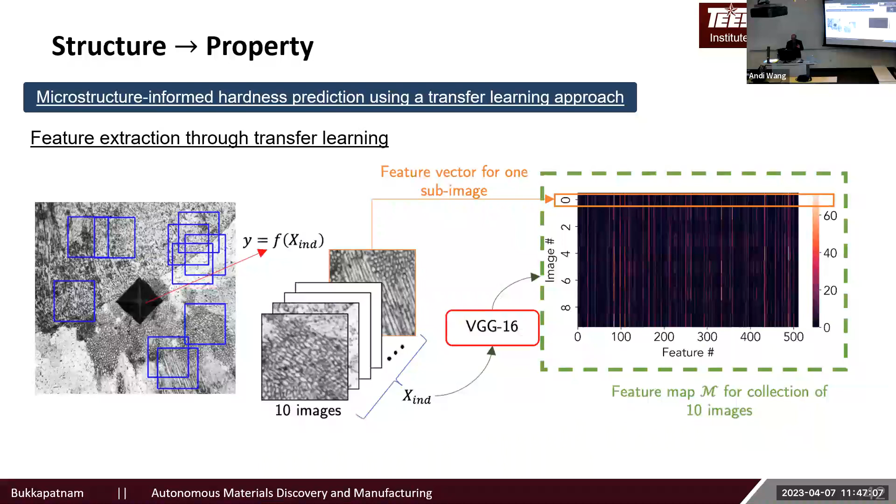I'll skip the details of this. Once you do this, we're not just getting the features, but the features were revealing something very interesting. At different layers, different kinds of information are captured.

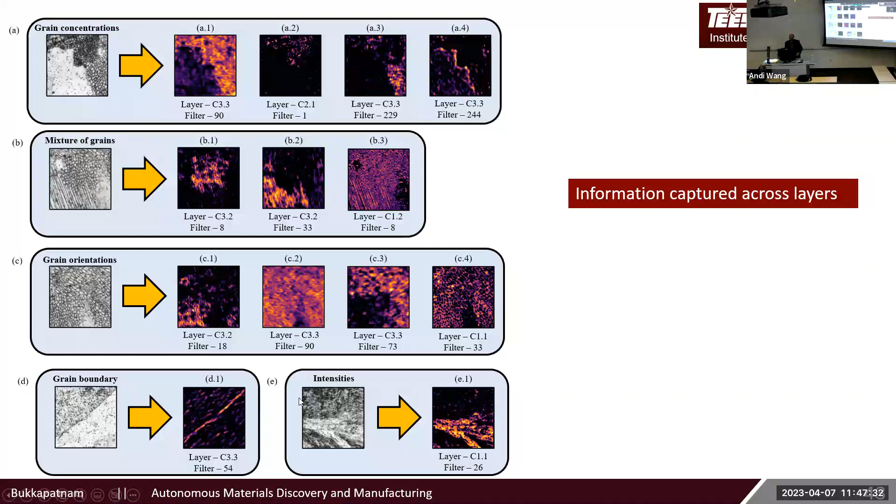You can see grain concentrations captured in different layers, mixtures captured in some other layers, orientations in some others—everything is somehow captured in this deep learner that we were able to leverage. From this, if you use a simple relationship, a simple model connecting this feature to the hardness, you can get really good representation.

Again, why it works, we believe, has something to do with taking the information of all my family and relatives to make that prediction.

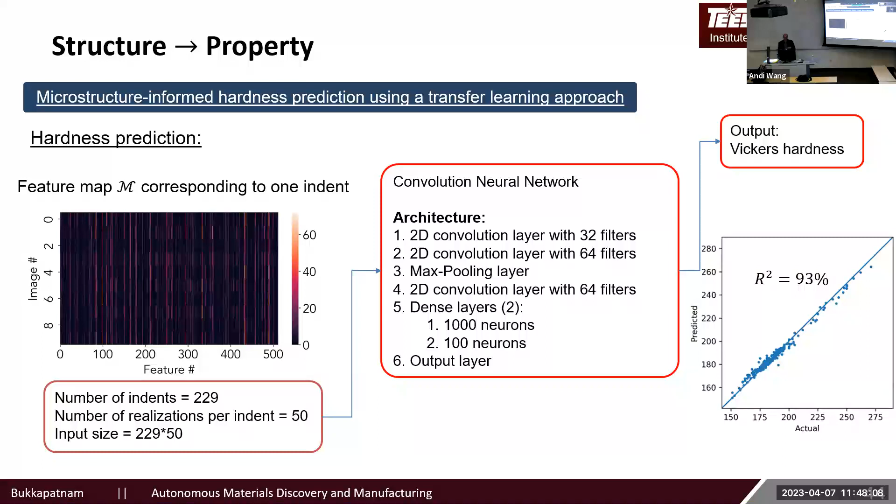So what is the advantage from a practical standpoint? If these kinds of approaches work, you don't have to take the part to the micro hardness tester. While you're making it, you take a picture, and based on the pictures, you can hope to get this information. Of course, that particular micrograph should be properly done.

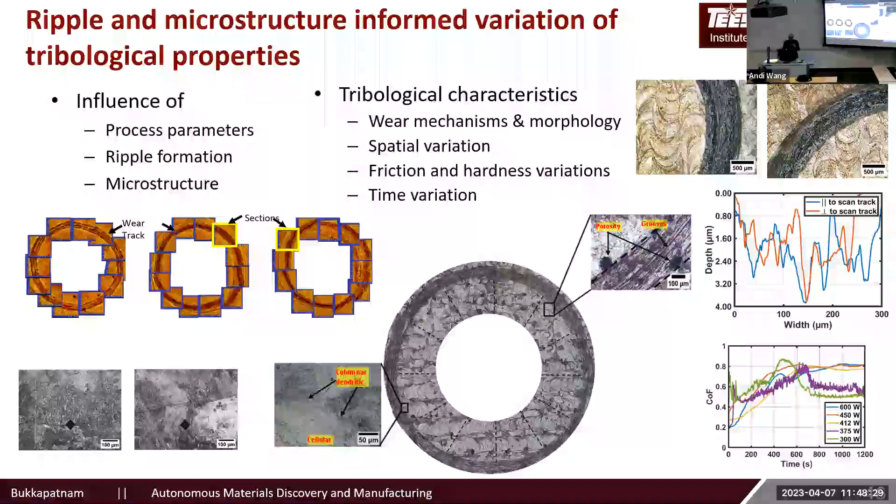There are other kinds of things we can do, but in the interest of time, I'll run through this in two minutes. We were able to use the same kind of information to predict some tribological properties, like friction. And again, the ripples I talked about earlier were pretty influential in making those decisions.

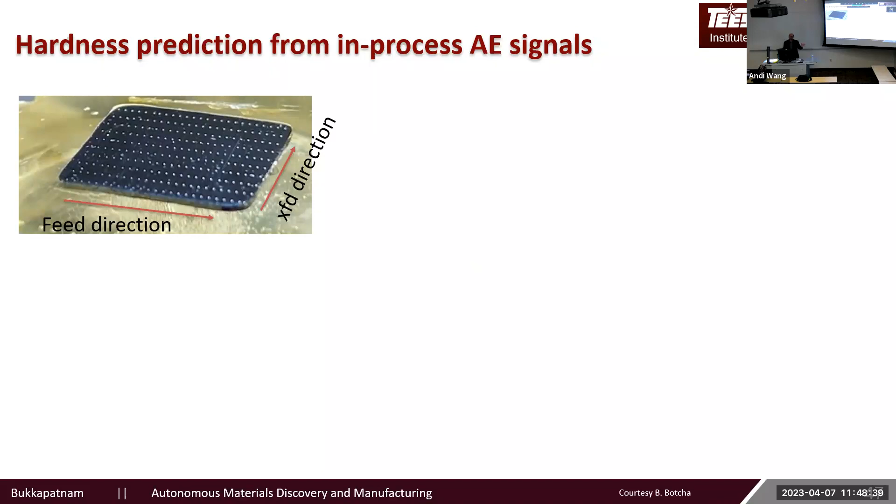You don't even have to go to the microstructure level—once you know the morphology, you can predict the tribological properties. Also, we were looking at using the same acoustic emission to predict hardness. We were kind of moderately successful, but the work is still going on.

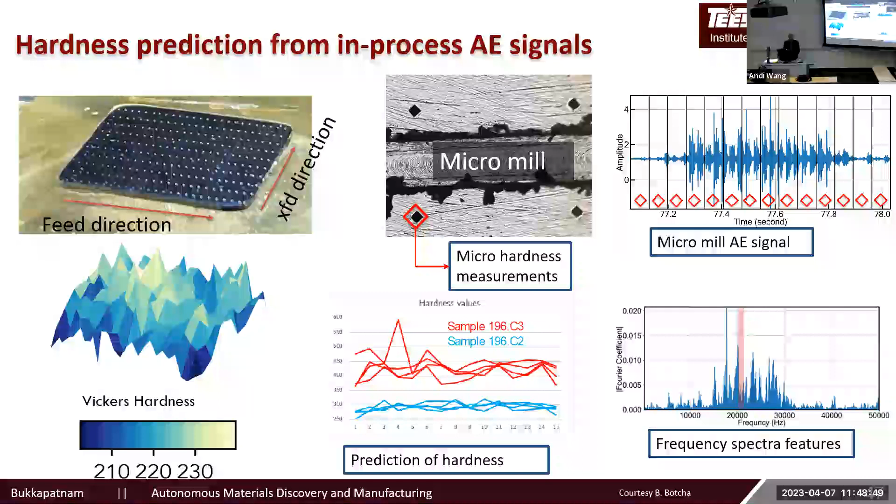With that, I will conclude today's presentation. Again, I hope I was able to introduce you to this idea of autonomous materials discovery and manufacturing. We talked about the smart hybrid machine system we're working on, and the things you can do with it.

Actually, what we've done is basically a minuscule amount of analysis of the data that comes out of this. There's a lot more that could be done, and a lot more advancements we could make, both in developing newer kinds of learning applications, as well as adaptation and control applications. On that note, I wish to conclude this presentation.